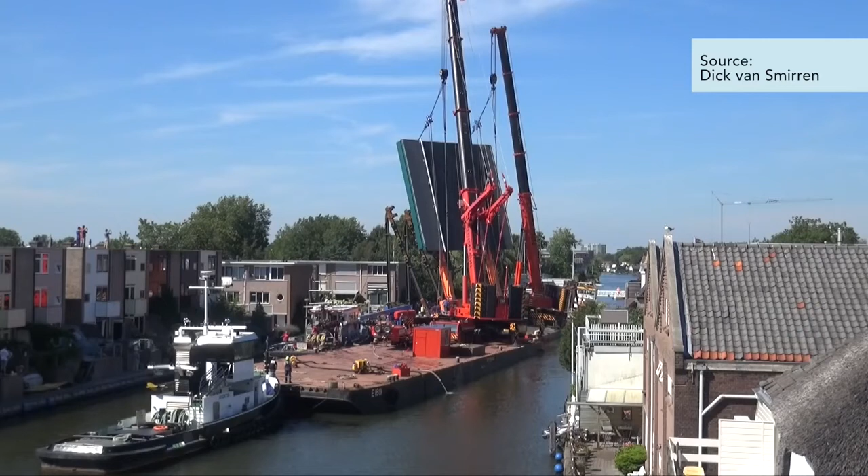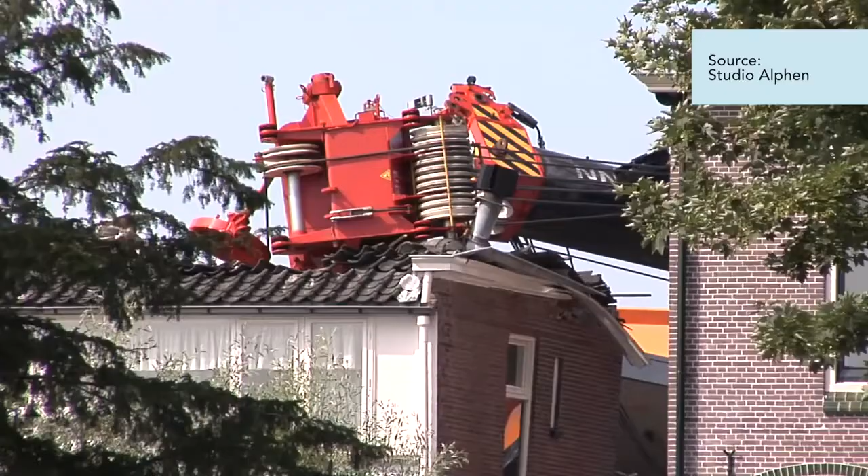On the 3rd of August 2015, a lifting rig of a section of the Queen Juliana Bridge in Alphen aan den Rijn capsized. Both cranes and the lifted bridge section fell on the surrounding buildings. Many were completely destroyed. Miraculously, no persons were injured.

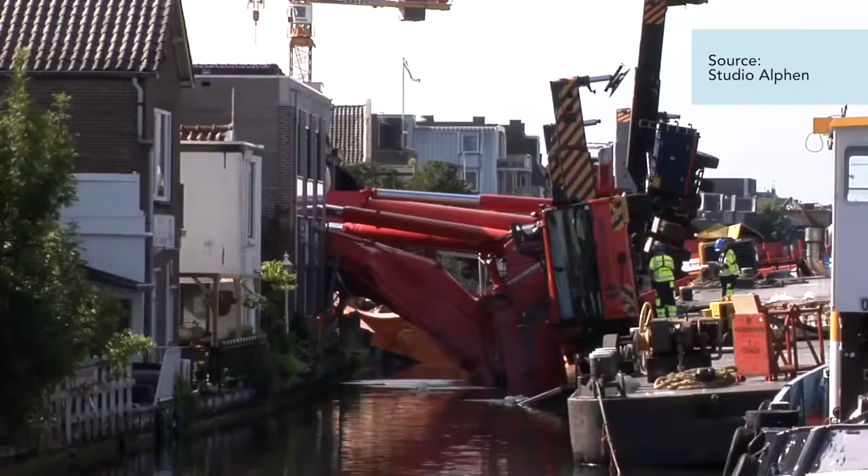Why did the lifting rig collapse? How did the parties involved assess the risks of this complex operation, and how did they manage the safety risks for the surrounding area? The Dutch Safety Board started an investigation into these questions.

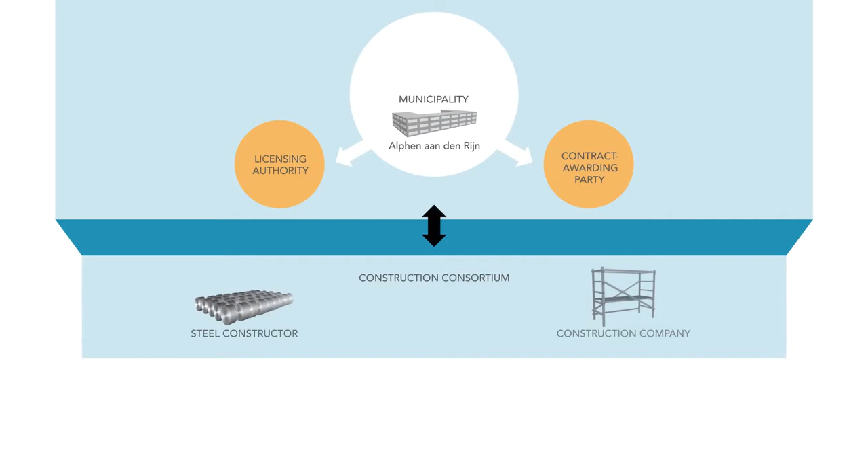The municipality of Alphen aan den Rijn commissioned the renovation of the bridge to a consortium of a steel constructor and a construction company. The steel constructor hired a crane operator to lift the bridge section. The crane operator subsequently hired the barge operator.

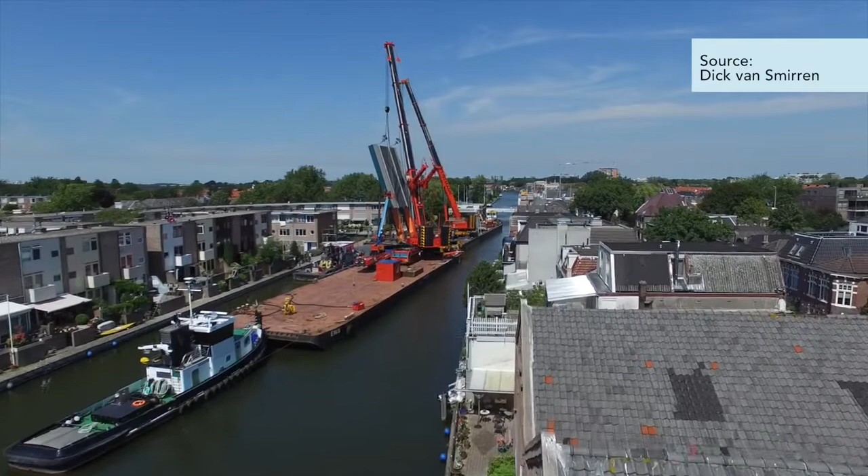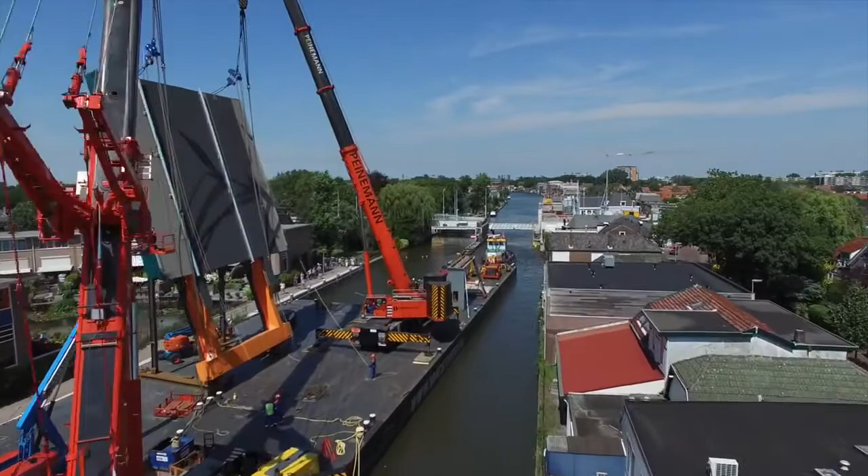A large mobile construction crane of 700 tons on the first barge and a small construction crane of 400 tons on a narrower barge were deployed for this lifting operation. The intention was to simultaneously lift the bridge section from a third barge in a tandem lift operation.

The bridge section would then be maneuvered in between the two cranes before being tilted into an almost horizontal position. The two barges would then sail 100 meters, where the bridge section was to be raised and fitted into the existing bridge structure.

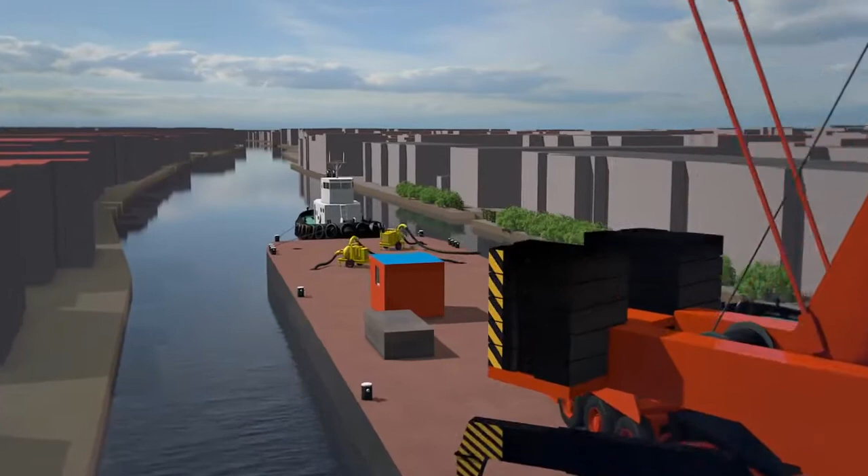The crane operator and barge operator had worked together before, and they believed in the feasibility of the plan, as long as the work was undertaken cautiously and if ballasting of the barges would be done in time.

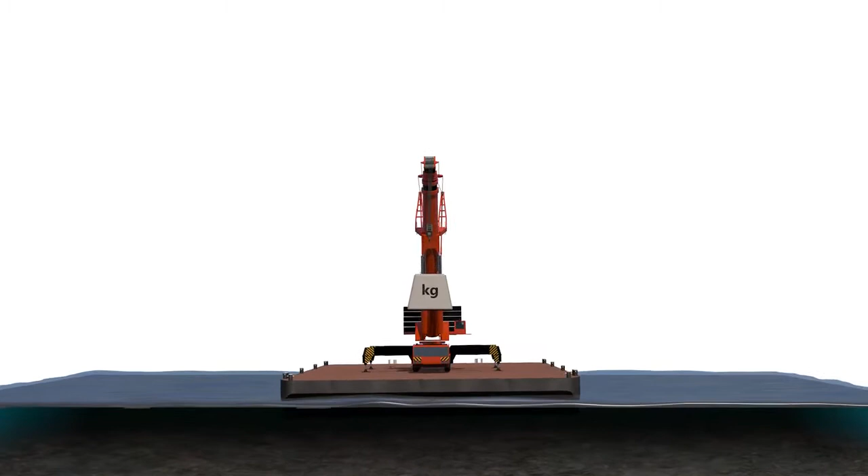Floating objects, such as barges, can move freely in water. The amount of movement depends on the stability of the rig. The more stability, the less movement, and the sooner it returns to its starting position. Stability is determined by the width and depth of the barge and by the height of the center of gravity in the crane masts.

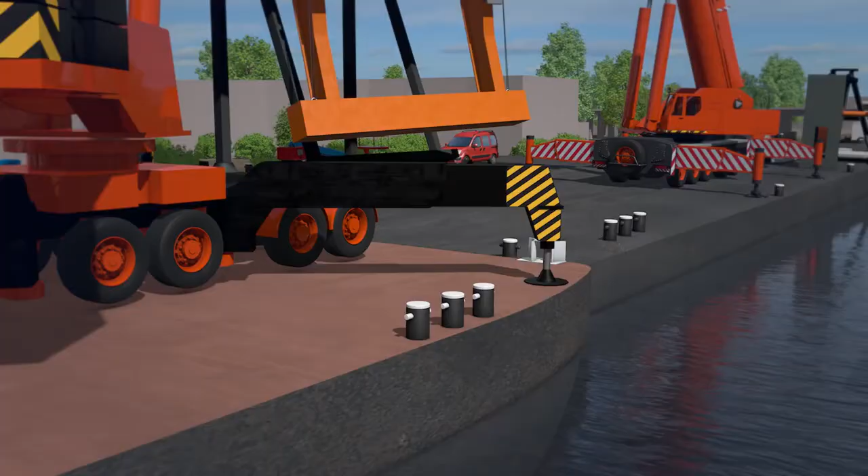The lifting rig as used on the 3rd of August, in particular the barge bearing the small construction crane, demonstrated insufficient stability and started to slope to such an extent that the mast of the crane failed, causing the crane itself to topple, thereby pulling the bridge section with it, which in turn also pulled over the large construction crane.

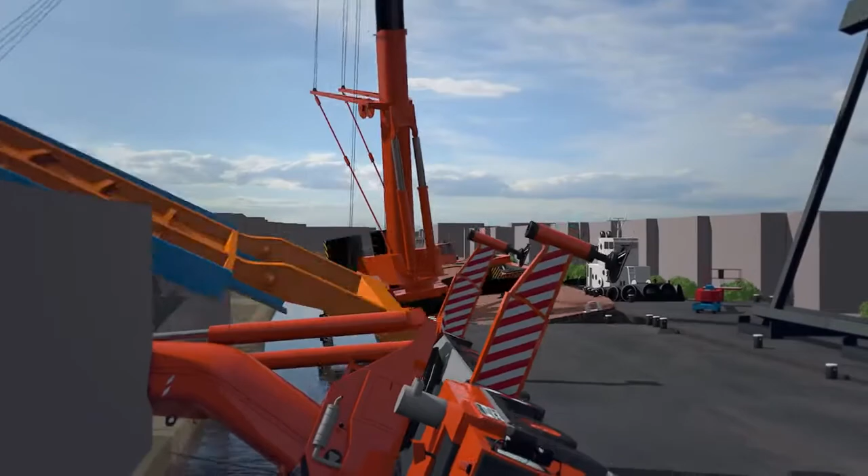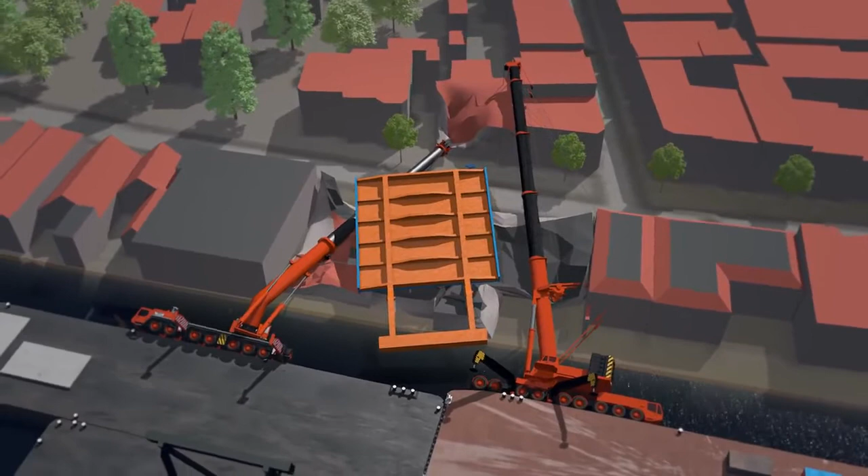The complexity of the lifting operation had been underestimated by the parties concerned. There was a lifting plan that failed on critical elements. The cranes were too high in relation to the width of the barges. In addition, several heavy objects were placed on deck, further reducing the stability.

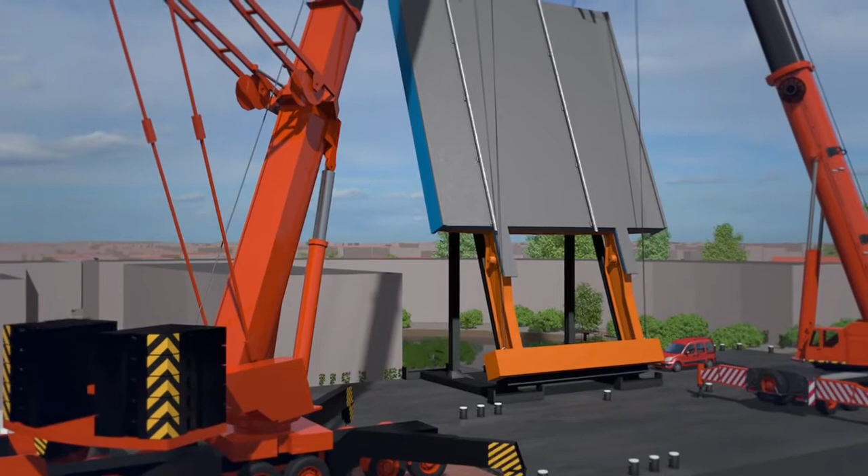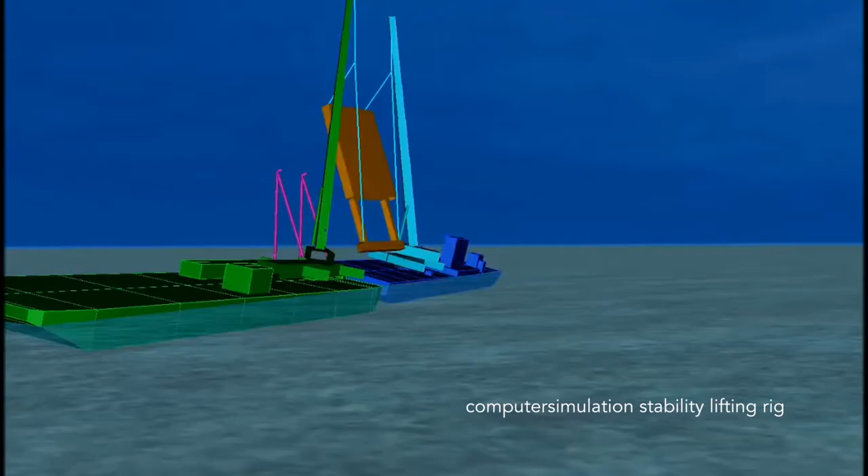There was no margin to absorb additional forces caused, for example, by natural bending of the mast of the crane, the movement of the cranes, or a gust of wind. A relatively small movement of the cranes caused the whole construction to topple. The Dutch Safety Board recalculated the initial stability and concludes that even if the lifting operation had been carried out faultlessly, the accident could not have been avoided.

The lifting rig was situated in the densely populated centre of Alphen aan den Rijn. The largest crane towered with 44 meters far above the surrounding buildings. None of the parties involved recognized that the lifting of the bridge section engendered risks for the immediate surroundings.

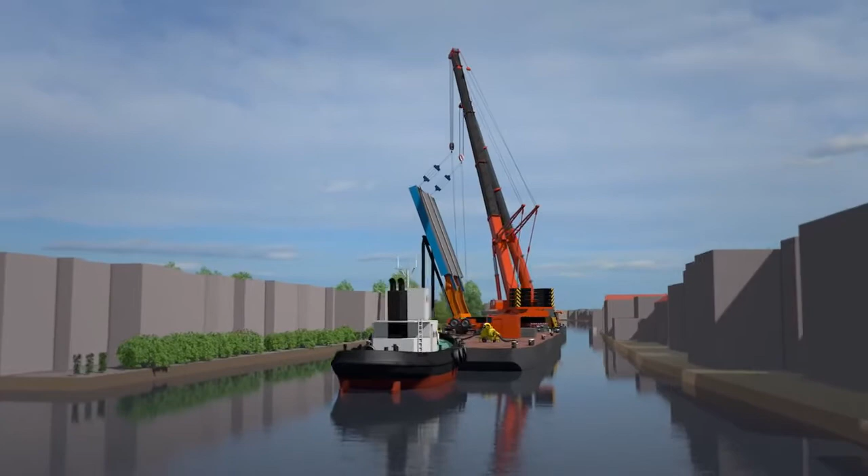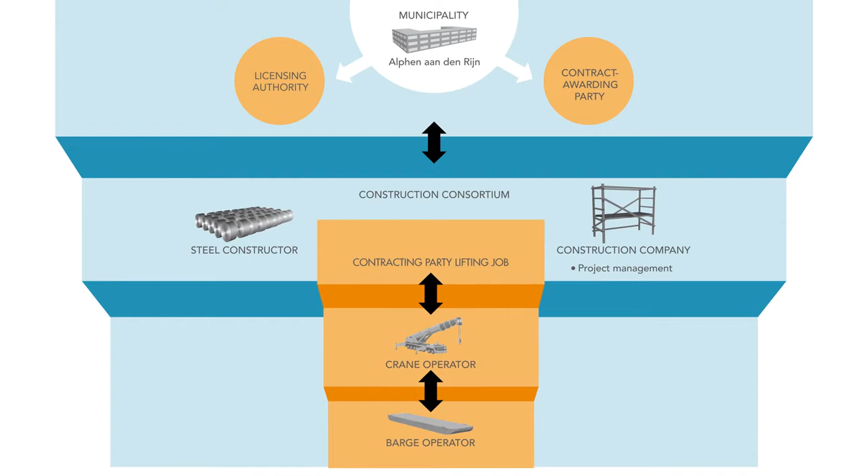Within the construction consortium, the construction company, as project manager, occupied a key role in coordinating risks. However, the construction company saw the hoisting of the bridge section as a responsibility of the steel constructor and therefore not its own. Neither noticed that the lifting plan was inadequate, and they let the lifting start with an unsafe rig. Safety focused merely on the workers and the construction site itself.

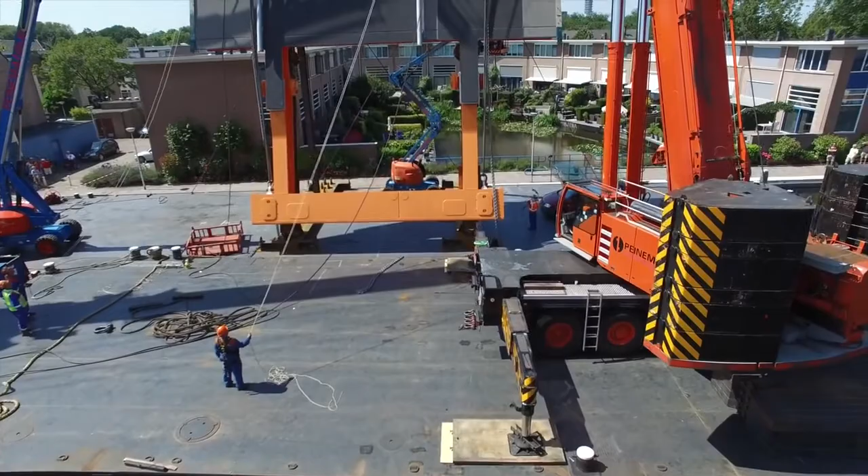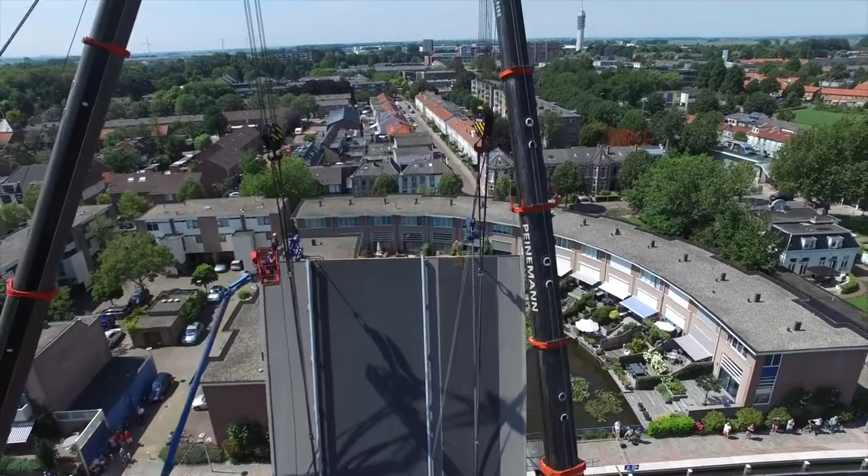The municipality of Alphen aan den Rijn attached considerable importance to avoiding additional nuisance for the local residents during the renovation work. When issuing the license for the renovation, the municipality could have demanded a construction safety plan for the area describing safety measures, but failed to do so. As a result, the execution of the work, including the lifting work and the related safety risks for the surrounding area, remained unconsidered.

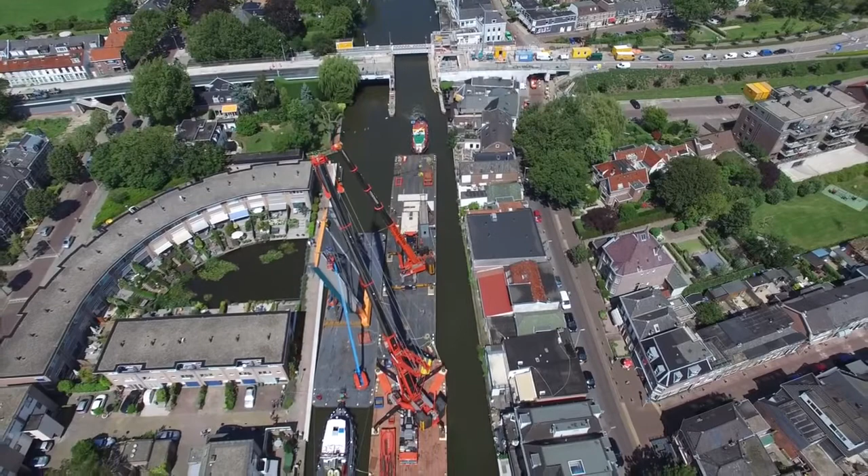The Dutch Safety Board concludes that various parties blindly trusted in one another's expertise and relied on the responsibility of the other parties in the chain. This pattern was reflected throughout the project organisation, from barge operator through to municipal authority.

The Dutch Safety Board has the following recommendations. To the construction companies involved: for future building projects, ensure that adequate risk management is performed for the entire construction process. To the Minister for Housing and the central government sector: ensure that any building project is designated one party responsible for risk management. Enlist in the building decree when a construction safety plan is needed.